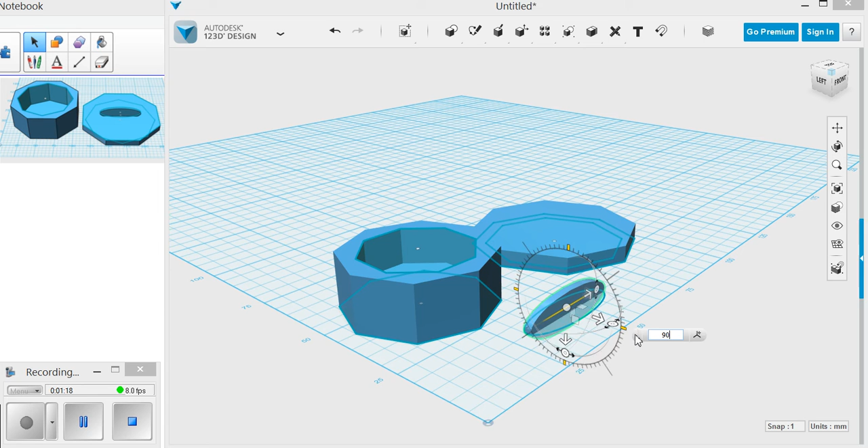Now I want to rotate this, so you click on move, and I want to rotate it and flip it on its side. I want to go on this axis here, so it's going to be rotating like that. You can rotate it if you want, or you could just type in 90. That'll give it a quarter turn, which is what you want, and then hit enter. So now you can see it's vertical.

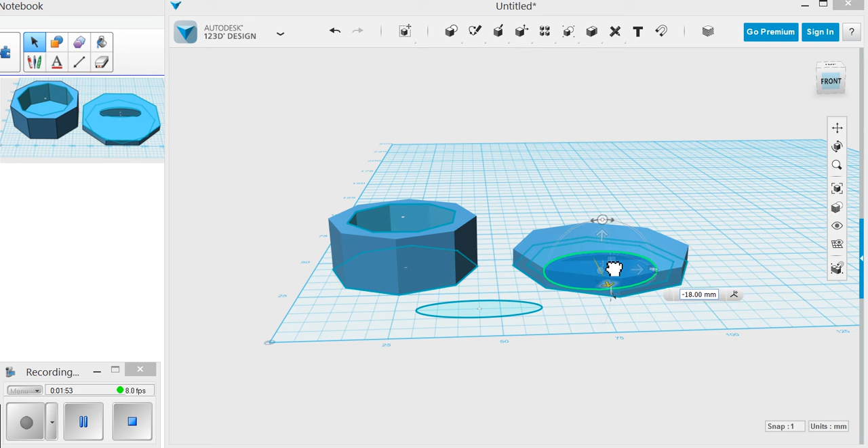Then I want to move it so it sits on top of my lid. Again, I'm just going to click move, and you can see if I grab it in the center, it moves it around anywhere. It's probably better to move it using those arrows so it goes exactly straight, and we'll line it up perfectly later. Then you grab the front one and it moves it front and back. So you approximately put it there, get it about where you think it is.

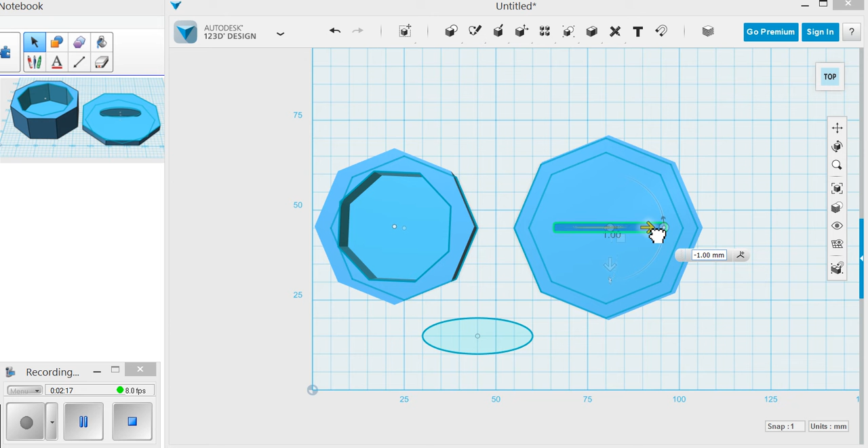Then you change your view and notice that you're quite a bit off. So I'd go to the top view and get that one figured out this way, lining it up as best you can so it looks pretty even, and then from right to left as well. Approximately center. If you want your handle off center, you can definitely do that as well.

Now the other thing is, you'll notice it doesn't stick out very much, so I'm going to have to move it up. The easiest way to do that is click on move and rotate and click the up arrow so it pulls it straight up.

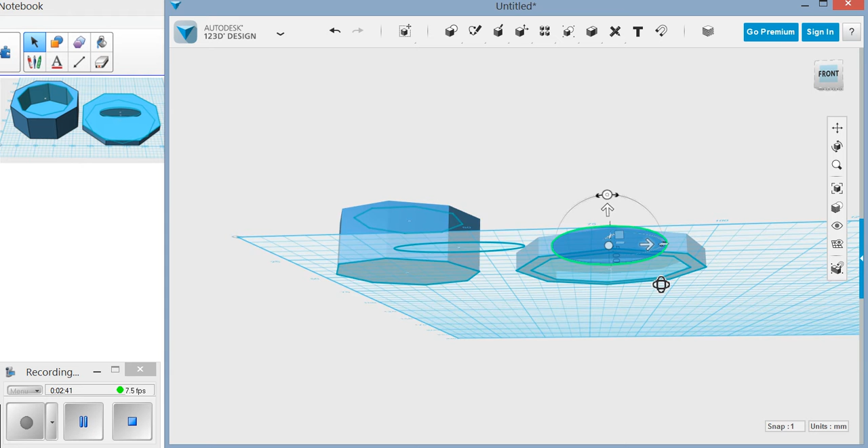Then you want to look underneath to see if it sticks out underneath at all. It's a little hard to tell, so you may want to zoom in, but you can see that part there would be sticking down. You might want that, but you probably don't, so you keep moving it up until you can no longer see that underneath. Then you hit enter and confirm, okay, I see nothing there, but it is still going to be a part of that object.

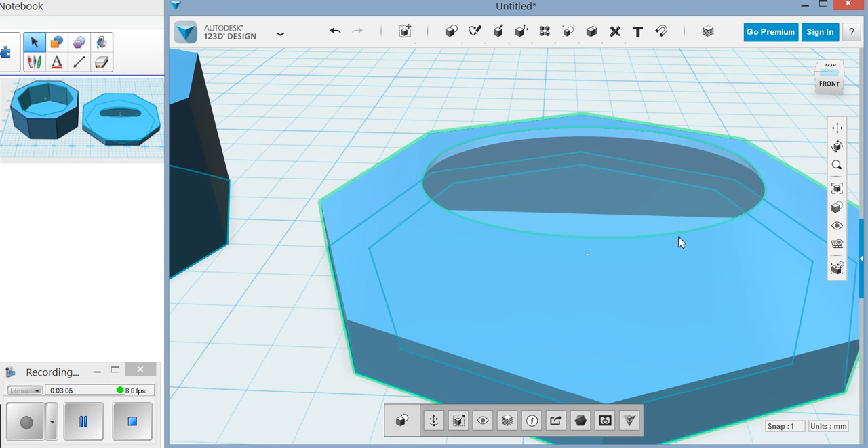Then to finish that off, you want to highlight the whole thing like that, and then go to group, which groups them together so that if you ever move it after, it moves all as one shape now. Remember those lines just stay there so we could easily replicate this after if we wanted to. They will not print out, so you don't have to worry about them.

So that would be your keepsake box with a lid. Again, you don't have to choose the same shapes as I did, but if you want to, you definitely can.

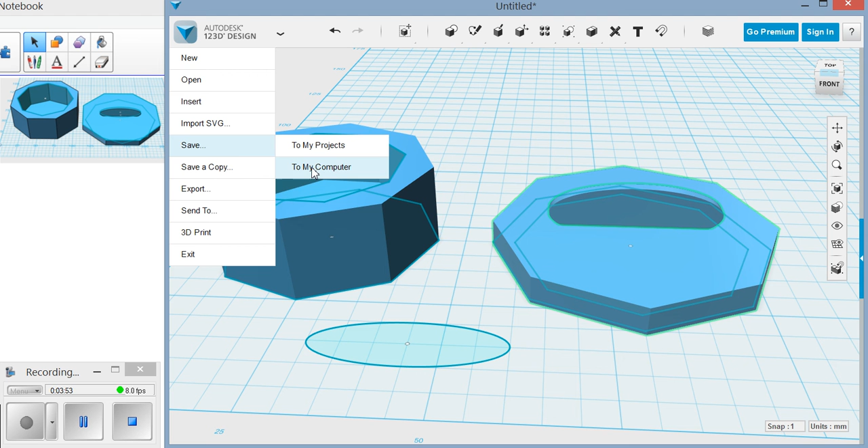At this point in the video, what you would want to do is save to my computer, and just like we've been doing, don't worry about exporting at this point because we may or may not print this. You'll be making a choice which ones you want to print. We're not going to be printing all of them. So if you decide you want to print this one later on, you can open it up and then export it to STL at that time, and I'll talk about some things you have to do.

So if you choose your keepsake box, you can hit export, but there's a few things we have to do first.